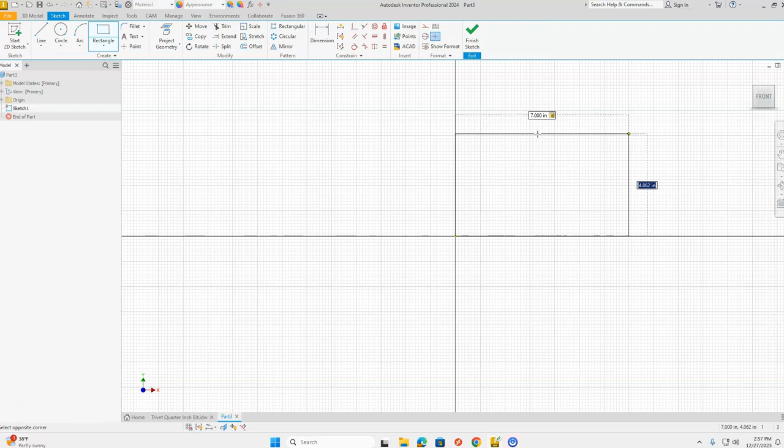Okay, so let's take a look at that. Start with our rectangle tool, starting at our origin, get our green dot. Stretch out a rectangle, type 7 on the keyboard, press the Tab key, type 7 on the keyboard, press Enter. We're going to click Front in our World View Cube to view what we did.

Green check mark, Finish Sketch. Go home. We're going to extrude, going in the flip direction, direction number 2. We're going to highlight our distance A here, and enter in a distance of 0.375.

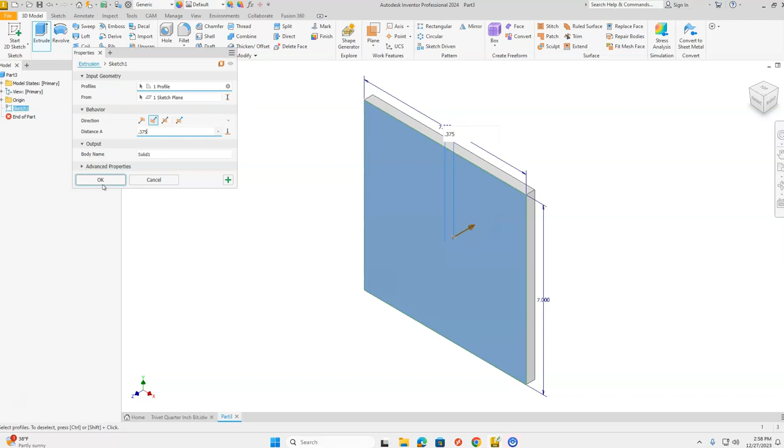Click OK. Next, we're going to take a 2D sketch, place it on our front view. Click Front in your World View Cube. Then we're going to create our rectangles. These slots that are in here are created with rectangles, and then we put fillets on them.

We'll show you how to do that here. So we're going to get our rectangle tool. We're going to first start with a rectangle, stretch it out. The rectangle width is 5.5. Press the Tab key on the keyboard, and the rectangle height is 0.5, a half inch. Press Enter on the keyboard.

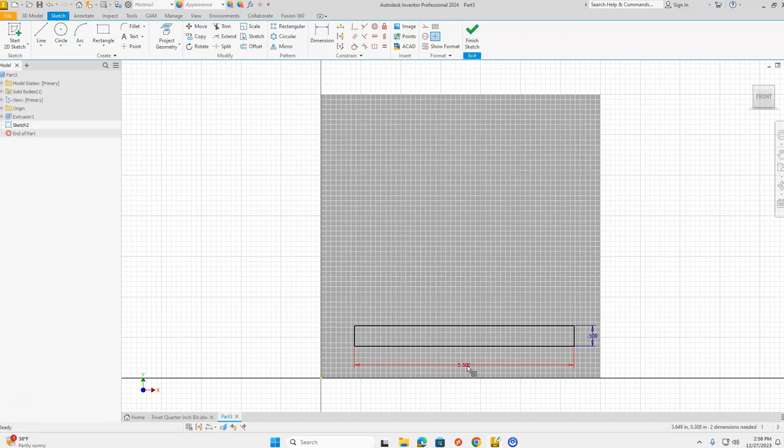Now we're going to take our dimensions so that this looks less cluttered, and drag them inside the rectangle. Now we're going to dimension the location of this part. So we're going to dimension from the bottom of our part to the bottom of the rectangle we just drew. Place this off to the side, and this is going to be a dimension of 0.75, 3/4 of an inch.

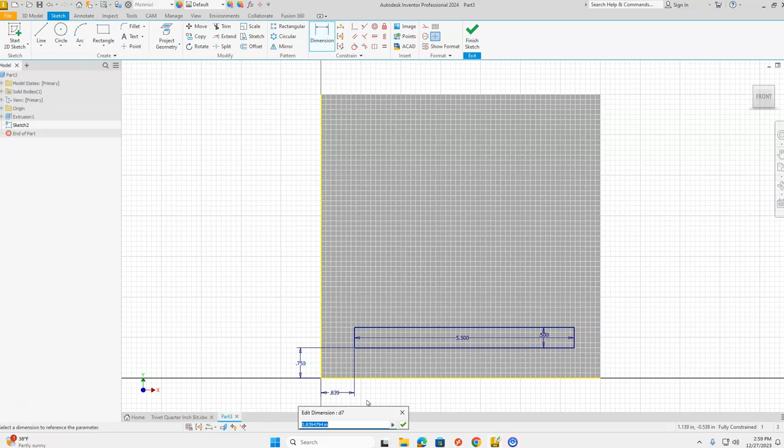We also need to dimension again from the outside on the left part of my part to the side of my rectangle that we just drew, and we're going to bring this down. This dimension here is also going to be 0.75. Press Enter on the keyboard.

It's going good. Let's try our next couple rectangles. Rectangle tool again. Stretch this rectangle out. For the horizontal dimension, 5.5 is what we're typing in. Press Tab. For our vertical dimension, 0.5. Enter on the keyboard. Once again, we're going to press the Escape key, and push our dimensions for this box inside of that box to reduce the clutter on the workpiece.

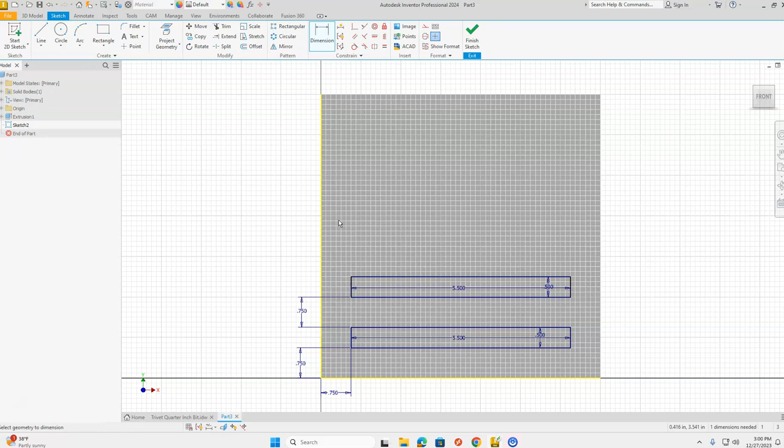Then we're going to dimension again from the top of this rectangle here to the bottom of the rectangle that we just drew. And this is also going to be 0.75. We also need to dimension from the left-hand side of our part to the left-hand side of the rectangle that we just drew. And this is going to be 0.75.

Now we have those two smaller rectangles yet to go that are here. They're a little bit different size. Let's take a look at how to make those. We're going to use our rectangle tool again. This rectangle is 1.25 for a width. Press the Tab key. 0.5 for a height.

Once again, we're going to take our dimensions, tuck them inside the box so it reduces the clutter on our work surface. And then we're going to dimension from the top of this rectangle here to the bottom of the rectangle we just drew. Bring this out to the side. 0.75 is the dimension for that. Then we're also going to dimension from the left-hand side of our part to the left-hand side of this rectangle. 0.75 for this dimension. Now we need another rectangle over here.

So let's create that rectangle. Kind of put it in the right spot over on the right hand side. 1.25 for the width, press the Tab key, 0.5 for the height, press Enter on the keyboard.

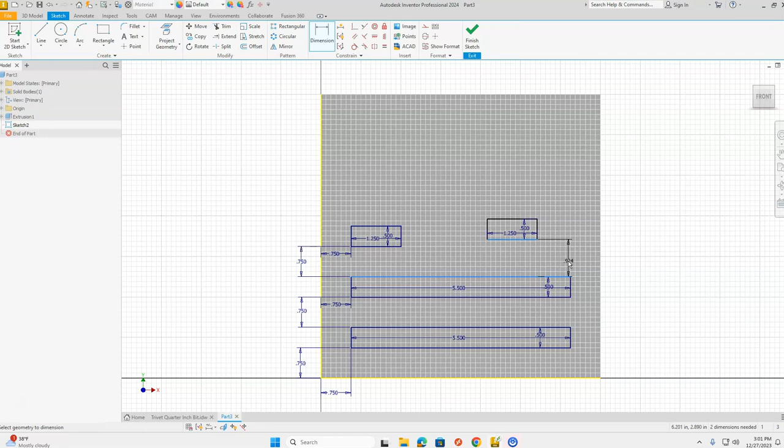Once again, we're going to take and slide our dimensions into the box so it's not so cluttered looking, and then we're going to dimension from the top of this rectangle here to the bottom of the rectangle we just created, and this is going to be 0.75.

Then we're going to dimension from the left hand side of our part to the left hand side of this rectangle that we just created. We're going to bring that all the way up and off to the part so that dimension's not going to interfere with us later on. And this dimension here is going to be 5 inches. Enter on the keyboard or a green check mark.

Now let's get back to those rectangles that are a little bit larger again. We have 2 more yet to go, these 2 that are here.

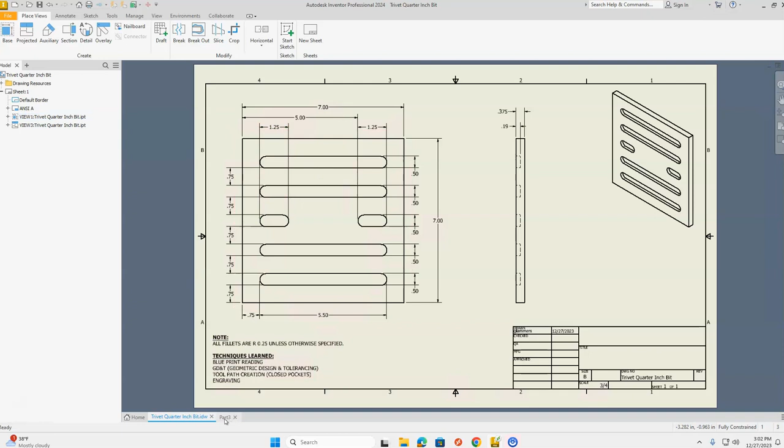Using our rectangle tool, we're going to create our rectangle. This rectangle once again is 5.5. Press the Tab key on the keyboard, and the height of that rectangle is 0.5. Press Enter. Just like we did before, let's press the Escape key on the keyboard and push these dimensions inside of our box so it's not so cluttered looking.

And then we're going to dimension the location of here. We want to dimension from the top of this rectangle to the bottom of the one we just drew. Bring that out to the side. This dimension is 0.75. Enter on the keyboard, or you can click the green check mark here. We need one more dimension here from the left hand side of our part to the left hand side of this rectangle. Bring that down. This dimension here, 0.75. Enter on the keyboard or click that green check mark.

We have one more rectangle to go. Select our rectangle tool. Bring this rectangle out. This rectangle is once again 5.5. Press the Tab key on the keyboard. The vertical dimension on this rectangle is 0.5. Press Enter on the keyboard. Press the Escape key. Let's tuck these dimensions into the box.

And now let's locate the position of this rectangle. We're going to use our Dimension tool from the top of this rectangle here to the bottom of this rectangle we just created. Bring that dimension out. And this dimension is 0.75. Green check mark in the box here, or Enter on the keyboard.

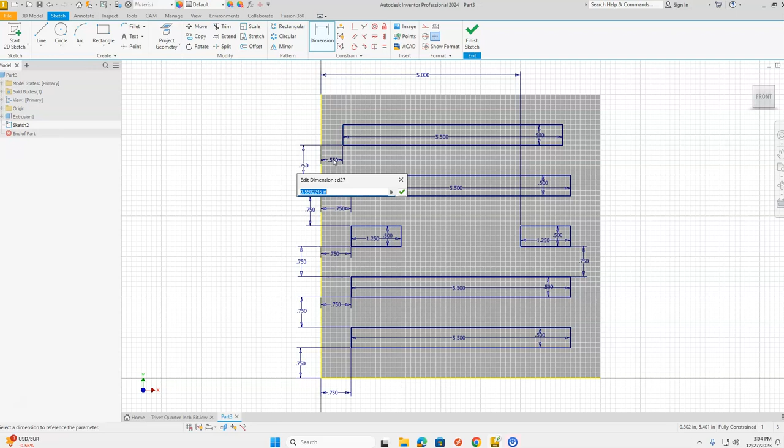We have one more dimension to go from the left hand side of our part to the left hand side of our rectangle we just created. Bring this dimension down. This dimension is once again 0.75. Enter on the keyboard or green check mark.

Okay, now if we take a look at our part, we have the majority of it drawn, but now we have to create these fillets that are along the side to round over the sharp edge of those corners. To do that, we're going to use our fillet tool here. We're going to change the fillet dimension to 0.25. And then we're going to come over and let's start at the top. I'm going to click my top line and my side line. And I'm just going to keep going around this rectangle, clicking each edge until I have them rounded over.

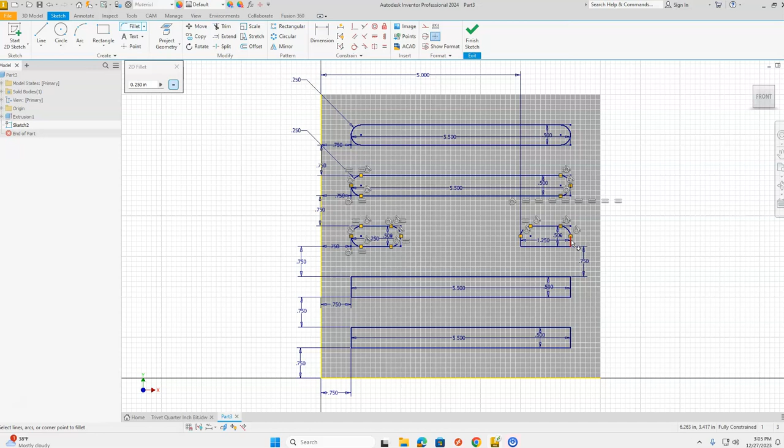Okay? See what that looks like? All 4 corners of that rectangle are rounded over. Let's continue with the rest of them. Click all your corners. Make sure that line turns red when you click. Second one's done. Now we're on to these smaller ones. It kind of shows you a little green sample of where that fillet is going to be pushed in. And we got 2 more rectangles down here at the bottom in order to do as well. Make sure you take a look and don't forget any of the corners.

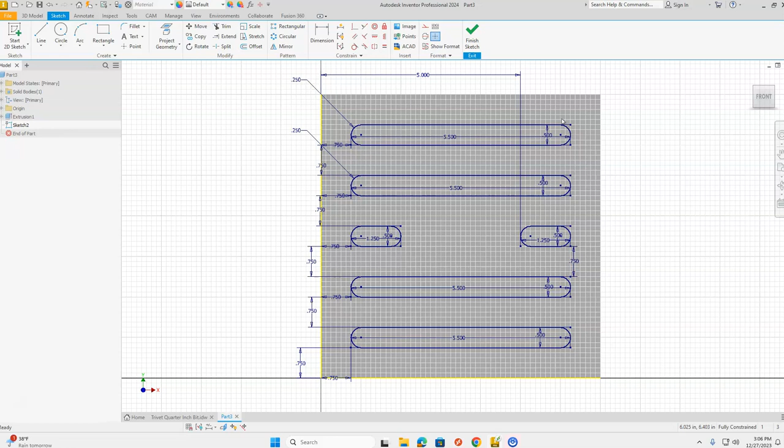Excellent. Once we have those all done, press Escape. Do a double check to make sure you have all the corners rounded over with those fillets. Once you double check that you have, click green check mark Finish Sketch at the top in the ribbon bar. And now we're going to extrude.

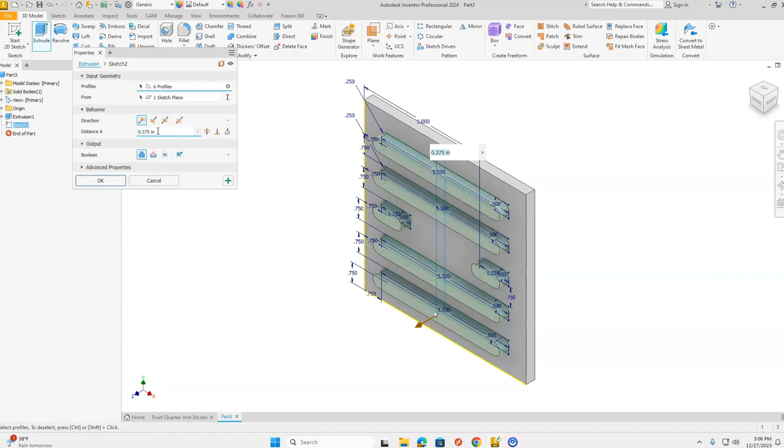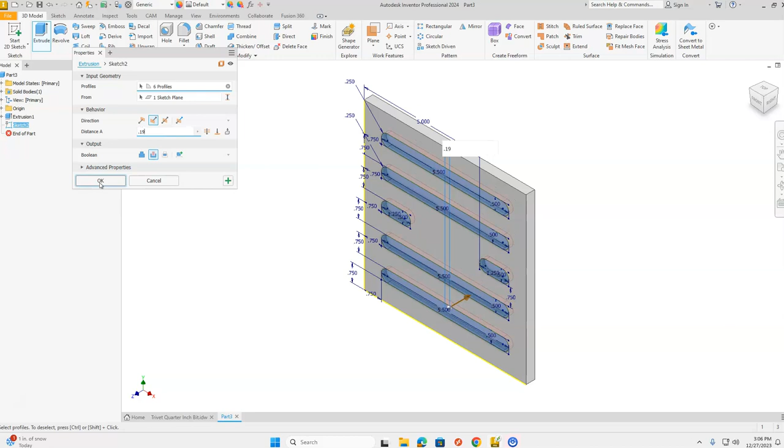Looking good, excellent. Now let's go up and save our part. We're going to go up to the top, go to File, go down to Save As. You're going to make sure that this is in your H drive, first initial last name 000. If this does not automatically select for you, click on your pull down arrow here in the menu and you're going to choose the last one down at the bottom. Okay?

And we're going to call this, highlight the file name, and you're going to type your last name, and then you're going to call it Trivet. Once you have that done, then we're going to click Save. Make sure it's in your H drive.

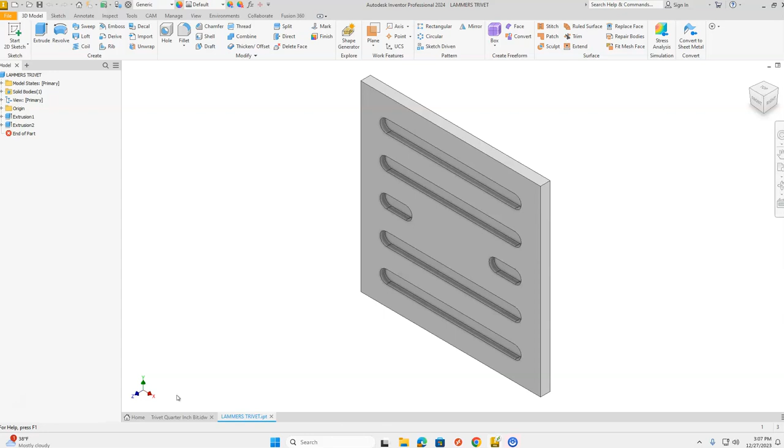Congratulations on drawing the CAD portion of this part. We're going to move next to the next video on how to create the CAM toolpaths. Okay? Take a break, go to the next video. We'll see you there.